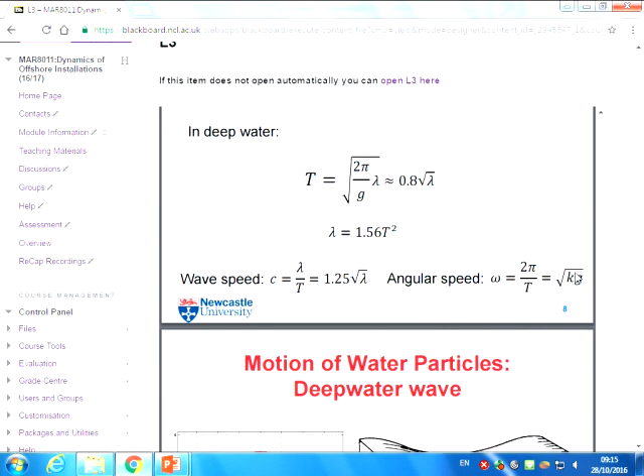Okay, and another thing is, because this expression is from some theoretical basis, today I give you some tables, and you can just find the expressions in your table, and in your calculation you can just use that. Okay. In the exams, will you give us this page? Yeah, this one is for your exam. Okay. So we can use this, from last year. We can use this. Yeah, yeah, yeah.

And in your future works, if you need to do some estimation for the wave force or something, I'm sure you can find the table somewhere. So we just use it.

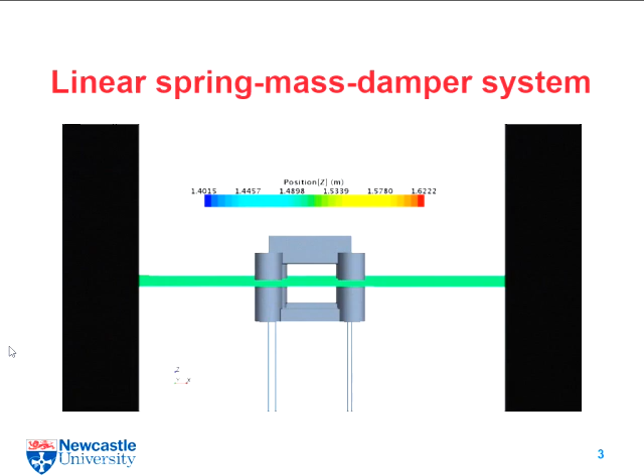So after we know the expression for regular waves, we can estimate some forces acting on the floating structures. So today we will have 3 or 4 examples to tell you how to estimate the wave forces on structures and how to get the motions based on the forces. Okay, but before that, I would like to show you a very short video. It's from a CFD simulation.

So in this structure system, you can see we have 4 mooring lines, and we have 4 columns, and we have maybe 2 or 4 pontoons. So you can see that if we assume the wave is a regular wave, you will have the structure motion like this. And if we consider the problem as a 2-dimensional problem, your motion will be in this way, right, by the waves.

And in the meantime, you also have heave. If you don't have this mooring line, you can feel the motion in z direction. And in this problem, we also have the motion in x direction. So of course, if we assume that it's a linear system, after we know the wave expression, we should be able to estimate the forces on that. And of course, after you have the force, if you can estimate the weight, we know that we have Newton's second law, and here is the motion, right?

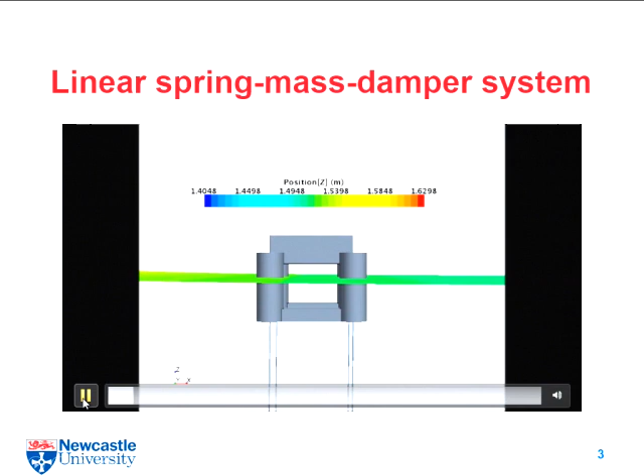I think you can feel that the motion is like something connected by a spring, right? Because after you print out the force plotting, the force will be like this. And it's like when you have a greater distance, you have greater force. So it's very like we are connected to a spring.

And we know that in water, if you do a ship resistance test, the resistance will be a function of velocity, right? We know that, and we can use this resistance curve to estimate the power you need from your propulsion system. But whatever, the force, or I use R for resistance force, will be a function of V, right?

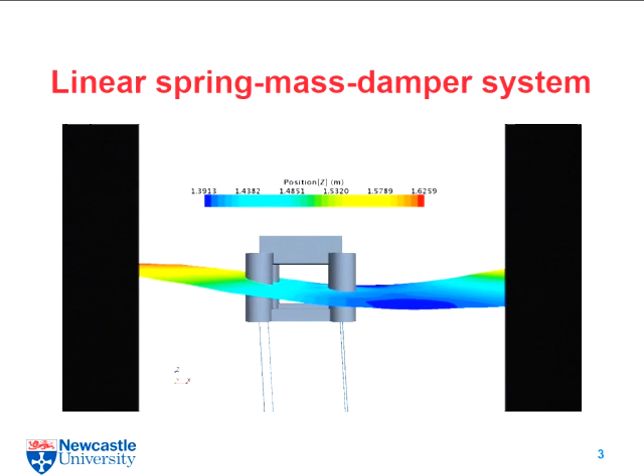It's very like it's connected to another thing, and we call that a damper. And they have different features to provide different forces. Like the first one, if we have a stiffness coefficient, the force will be something like the coefficient times the distance. You can estimate the force from this spring, right? And from the damper, it's about the speed.

If we have another coefficient, actually we can estimate the force, but this time it's not distance, it's speed. We need to do the differential operation over time.

If we have another source term for force, we can give another function, but it could be 0, right? But anyway, we can build up the equation for the whole system. We have the weight, we have the acceleration, and we have force, right? Here is this basis, and then we can create a new equation to include all the factors in this system.

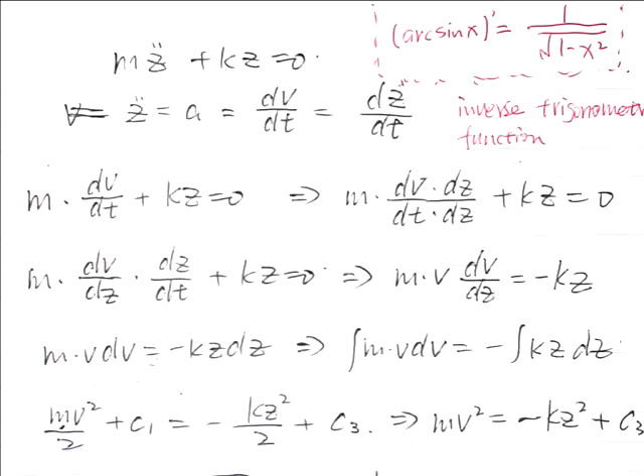Like from the very beginning, we have this equation, and according to the mathematical rules, finally we can have something here, the expression for z, the motion distance. And you can see that we have a constant here, we have a phase angle here, we have another constant here to control the motion amplitude. But anyway, you can see that if we go to the slide, it's in this form, right?

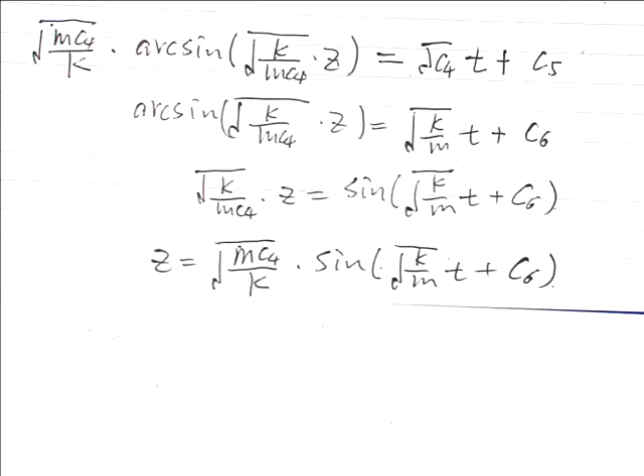And if you look at my solution carefully, you can see that the constant for the time, we call that natural frequency or natural angular speed. It's here, and you can find that from your table. So you see, it's here, constant for your time, and then it's for the conclusion here. Okay.

And then according to the definition for wave period, it should be 2 pi over the angular speed, or 2 pi over the frequency. After you know the natural frequency, we can know the natural period, right? It's over there. So to this system, you can see that if we know the mass, if we know the stiffness coefficient, actually after we know the wave, we will know the motion features of the whole system, and you can just apply the expression here as long as you have a good table.

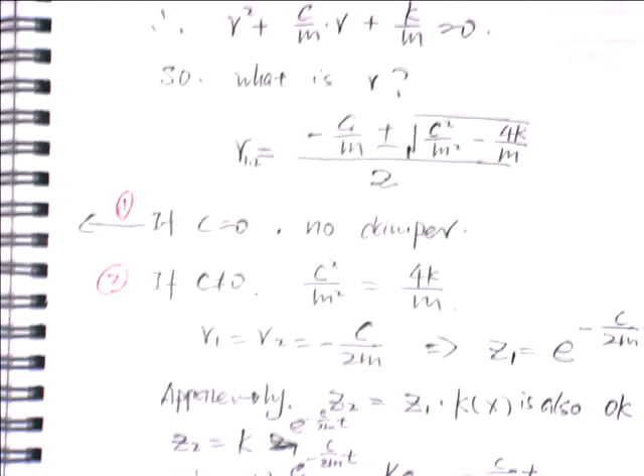And in this slide, because I got this from Professor Longbin, you will see the results straightforward. But again, last night I also did something to solve this equation. I used more than 4 hours last night to get this. And now this system is a bit more complex, you see that? Because we have the differential operations twice and one time, and also we have the original form. So according to the different values of C, we may have different solutions. Basically, if we just look at this equation, we may have 4 possible solutions.

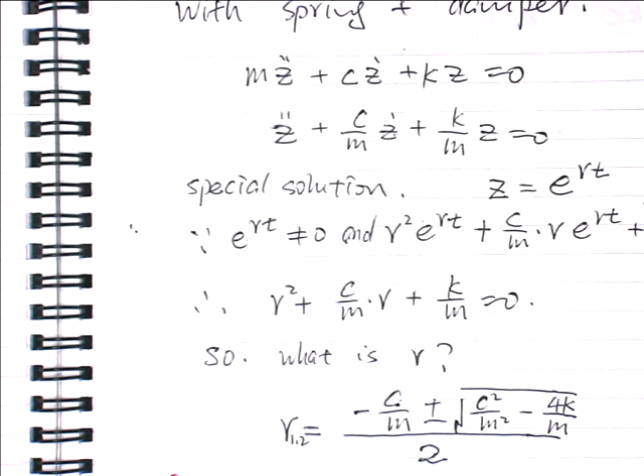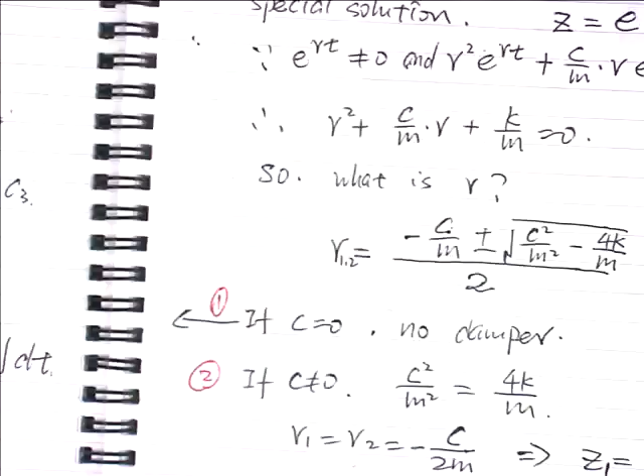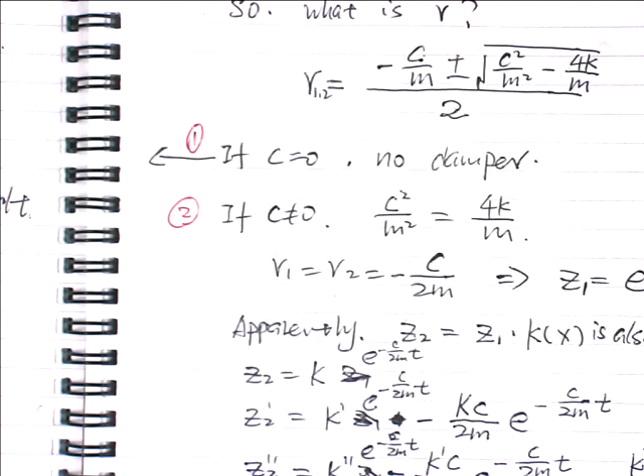The first one is, of course, C may be 0, so we can just go to the previous slide. It means we don't have this damper. So see, in my calculation, if C is 0, we can go to the previous one. But if C is not 0, we still have 3 different possible solutions, and they will present different motion features. Like when C squared over m squared is 4k over m, if in your calculation everything is correct,

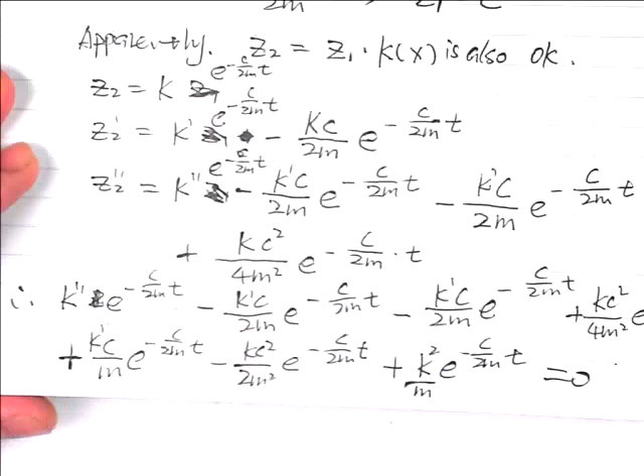and I'm confused there. Oh, here. The final solution is like this. We have some constants, but we do have an expression, and I can show you the final result is a constant, another constant, time, exponential, something like this.

But anyway, from the expression, you can see that for this system, yes, you have waves acting on that, but if you have a disturbance to your system, with the change of time, you don't have oscillations, right? Because we don't have a sine function or cosine function in this expression. So, with time, you will go to the middle slowly, and here is the theoretical basis. We don't have oscillations.

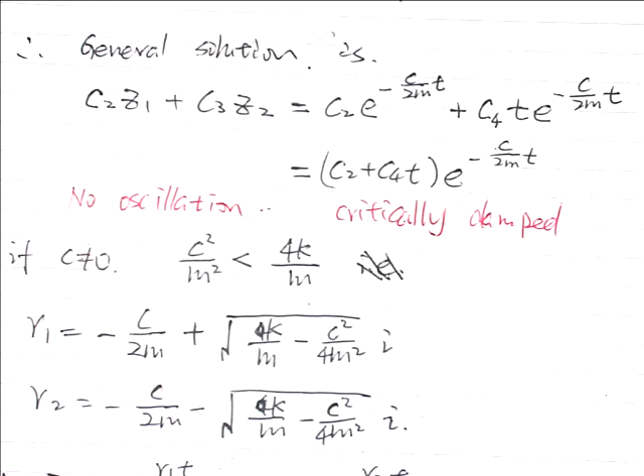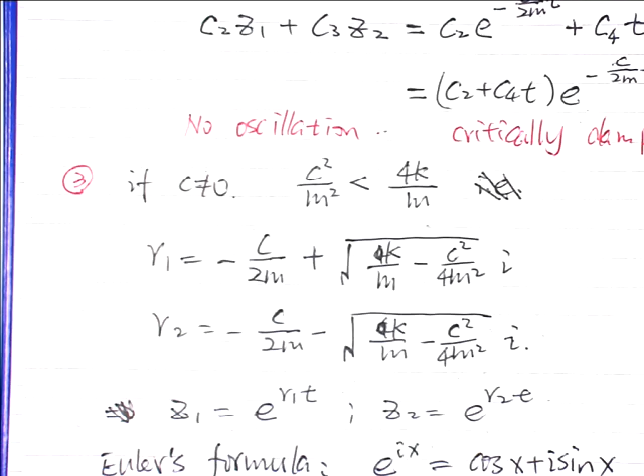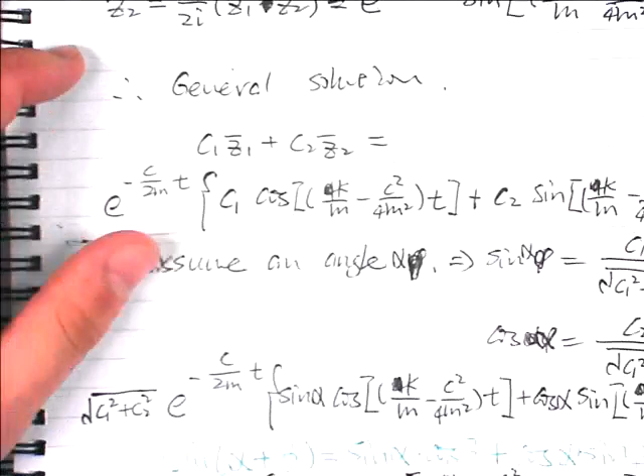If C squared over m squared is smaller than 4k over m, again we can solve this equation, and the final result will be here. It looks like a very complex expression, but if you look at this expression carefully, you can see that actually it's a cosine function, right? So in this expression, after you have a disturbance, you will have oscillations. And then, because we have a constant in this way, the oscillation will be smaller and smaller with time, right?

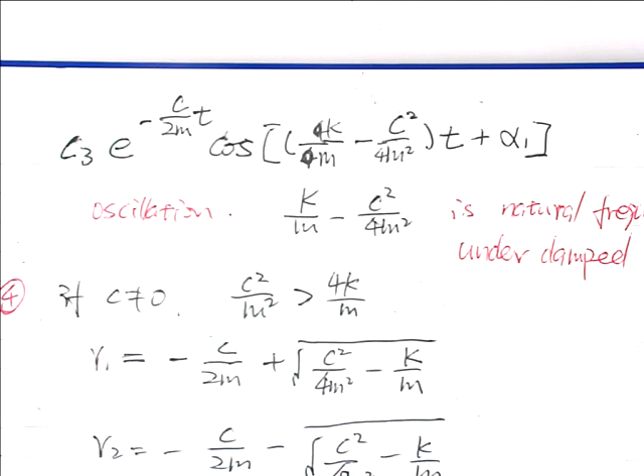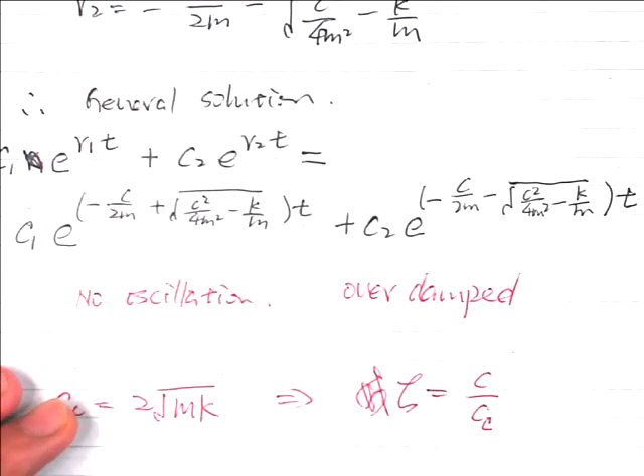If C squared over m squared is greater than 4k over m, again, I used another 10 minutes to get the result. Another expression. And you can see that in this case, we don't have oscillations again, and the expression will be here. After you have a disturbance to your system, again, the structure will go back to the middle position slowly. Probably, in this case, it has a different speed, like in this one.

So based on the expressions in this part, we will know that if you know the weather conditions in an area, and if you can assume that in this area the wave is a regular wave, if you have a good design, actually we can control the motion or the oscillation of your structure. Probably sometimes it's in this case, sometimes in this case, but in most cases we can control that. For example, we can give a good M, because we can control the weight of your structure by your design.

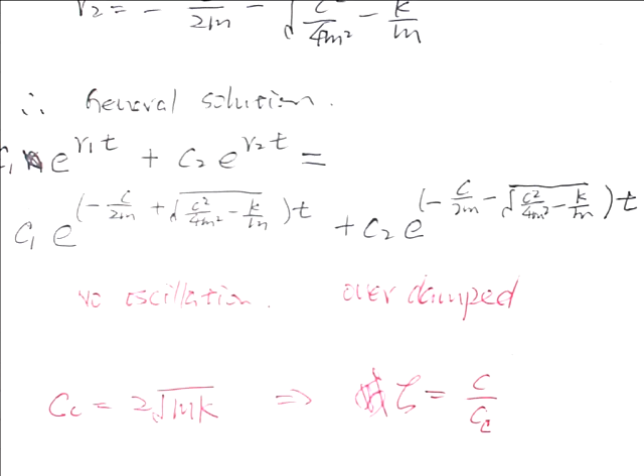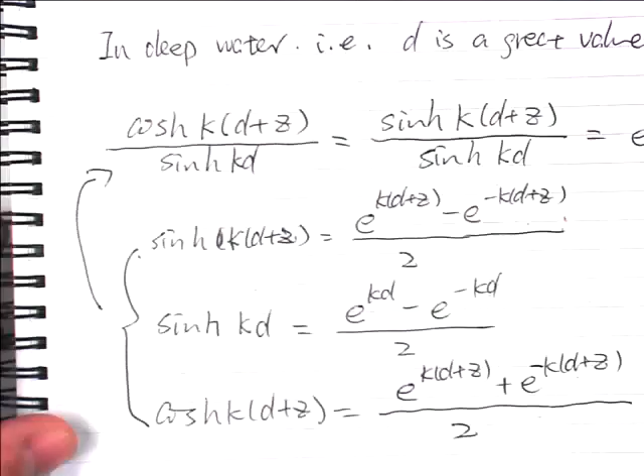So in this lecture or in this module, you don't have to understand how to get the results in this way, because you have some tables, right? But if you are interested, you can do the same thing like I did last night.

Seriously? Yeah. It depends.

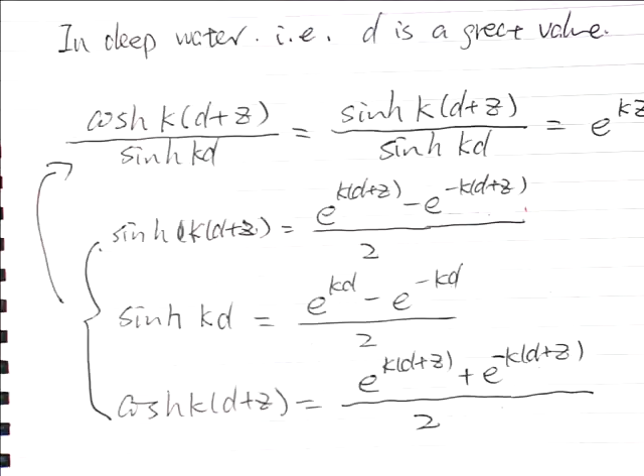So you see that in this slide from Professor Longbin, he told me we have 3 situations, but actually it doesn't include this one. We have 1, 2, 3, because we want to have a good system to include every factor we can imagine in our calculation. And then here is a very special one, and it's a very typical one.

If in your expression you have a cosine function, the oscillation will be like this. After you push it, it will oscillate. And then over time, the oscillation will be smaller and smaller, and then go to zero again. Okay?

In very practical cases, obviously we have weight, we may have a damper, we may have a spring, and we have waves impacting on that again and again with time, right? So from the very beginning, we have Kz.

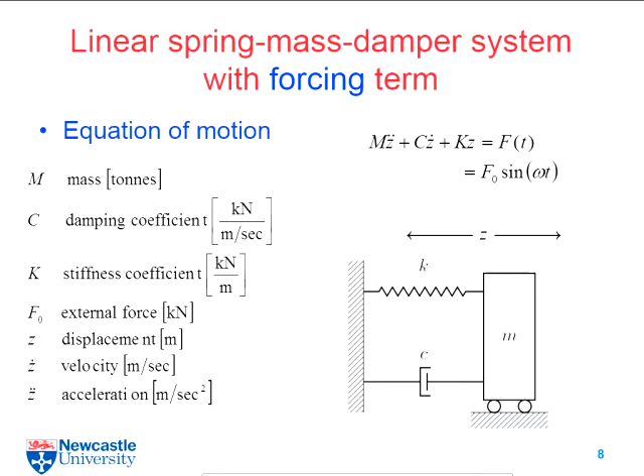So okay, you can see from this slide, I give you the expressions for the heave motion. And of course you can find them from your table, so I don't need to go through them again. But if you look at this expression, we can put some terms into a container, right? It's like a container, and we can present it in an easier way. It's F0/k times Q, if you have an expression for wave or something else. And this Q, you can find the expression.

It will be 1 over the square root of (1 minus (omega over omega natural) squared) squared plus (2 times damping ratio times omega over omega natural) squared. Here is Q, and Q should be included in the expression for heave motion or horizontal motion.

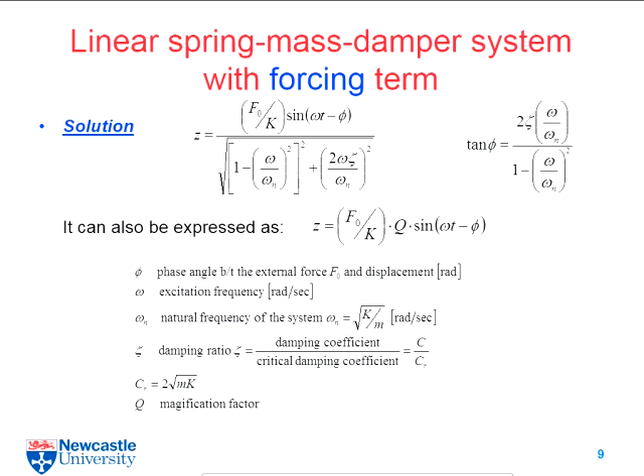But anyway, according to the expression Q, you can see that this term, of course, could be 0, could be greater than 0, but obviously it's larger than 0, right? But in this part, it may change. And then the natural frequency actually is from your design. So you can see that by controlling your design, you can control the Q, and then you can control the motion, right? So here is the reason why. Oh, here it is.

Here's the reason why when we design our structure, we try to avoid the area here, because you can see that if my natural frequency is very close to the frequency of waves, here will be 1, right, or very close to 1, I mean the value. So this part will be very close to 0. It means this part will be small, and this part will be a greater value, right? So when you calculate the motion, the motion will be greater.

Obviously for your structure it is not okay, and for your crew members on it, it is not okay. They will vomit every day. So this is motion response, yeah? Yes.

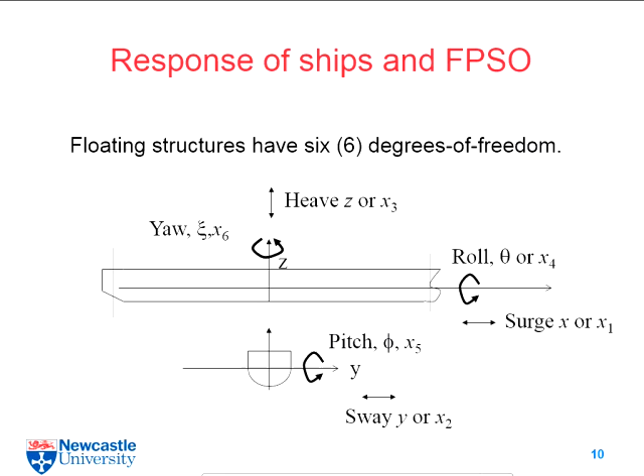And for a ship or a floating structure, we always say that we have 6-degree motion or 6-degree-of-freedom motion. And here in this slide, I can show you the 6 motions or 6 freedoms. We call them the heave, surge, and sway. Where is it? Here. Sorry, I show you the next slide. So I think this one is better, right?

We have 6 degrees of freedom. And if you don't have any mooring lines, you're just floating on open water, your ship may have motion in 6 ways. And when we try to find out the motion of your structures, our theoretical basis is F equals mA. But because for A, we may have 6 directions, and they have completely different motion features, we actually need to build up a matrix to include all the 6 degrees of freedom.

And then we need a sequence. And in this slide, I show you this sequence. Probably sometimes you see x1, x2, x3, or x11, x12, but it's always between 1 and 6. Here is the reason, and here is the sequence, okay? After you see the index here, you will see the equation is for maybe this one, or this one, okay? Because they have a sequence and they have index numbers.

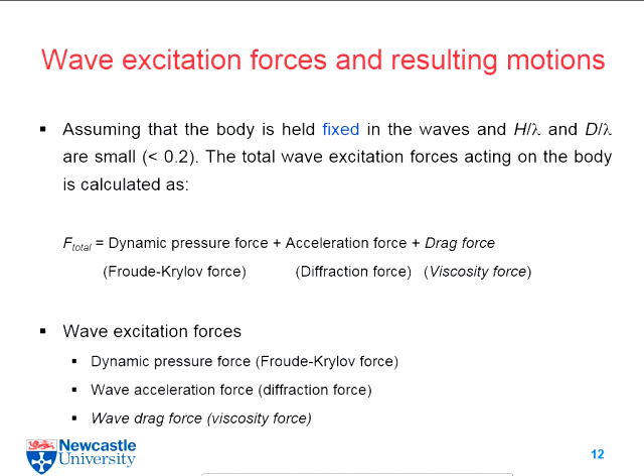Okay, so in a good calculation we need to include this part, otherwise for some structures it could be huge. Okay, so including this factor will give your calculation a better safety level or safety margin.

Can I have a break? Yeah.

If you have a pillar and you go in this way, here is water. You do the estimation for added mass in this way. But if your structure is moving in this way, here is another estimation. Yeah. So it depends on the direction, and sometimes you have different estimations with different rules. But you do need to include that factor, no matter the design of the structure. Rather than just reading? Yeah, it depends.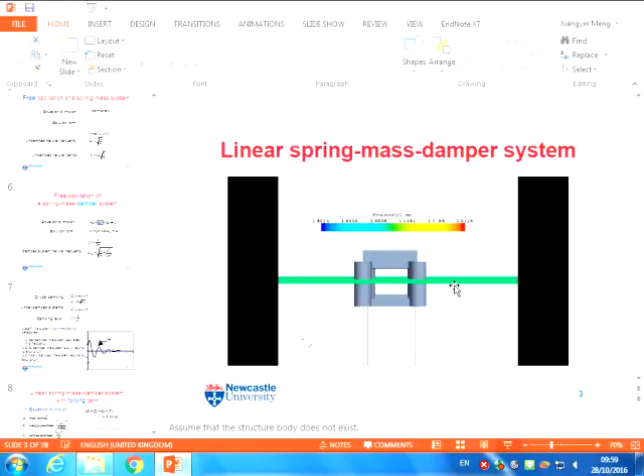It's better to understand when you're solving something rather than... There's also pneumatics, hydraulics, mechanical, and the last part, the second unit, was the electrical systems. We'll study electrical systems. Hydraulics, mechanical, electrical, you have these three. What are the differences?

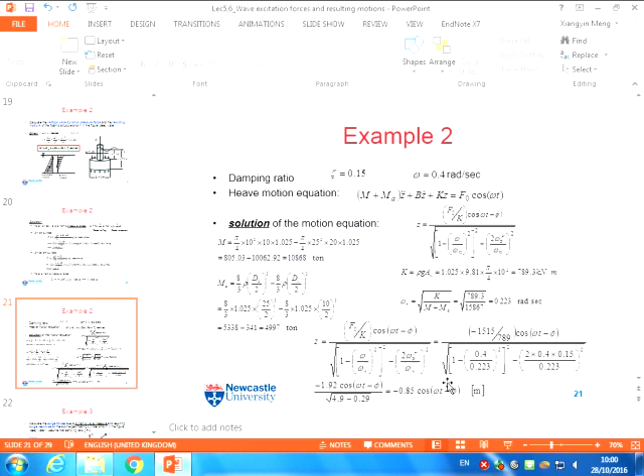What if you go through examples using this equation solution? I'll provide them in the next lecture, worked examples to show the application. We don't have the notes, so we don't know what to expect. We'll use 2 or 3 examples to let you know roughly how to use the table. Correct, because the theory part is very... Yeah, obviously, if you just know the expression, you will be confused. Okay, there will be examples. Thanks.

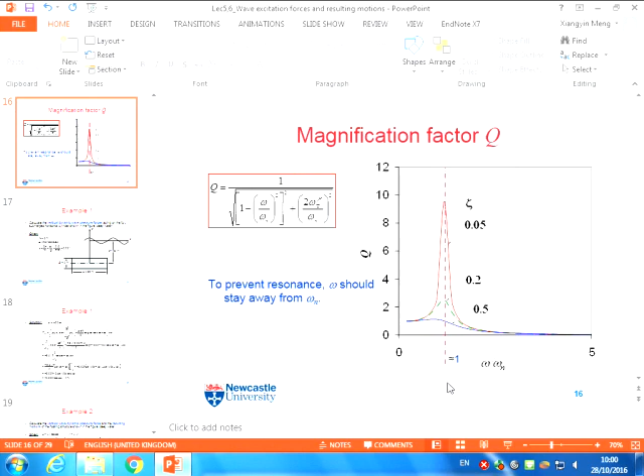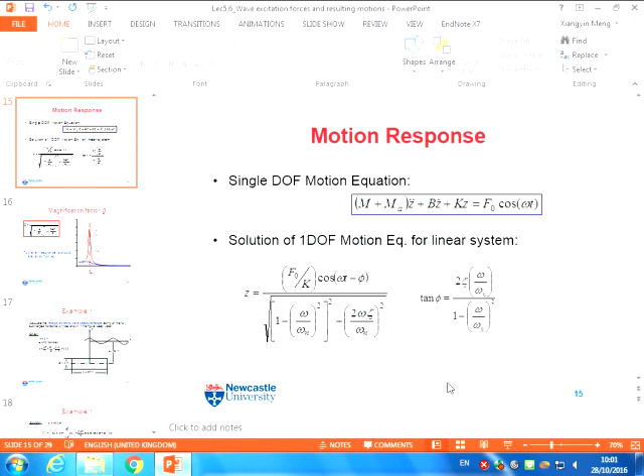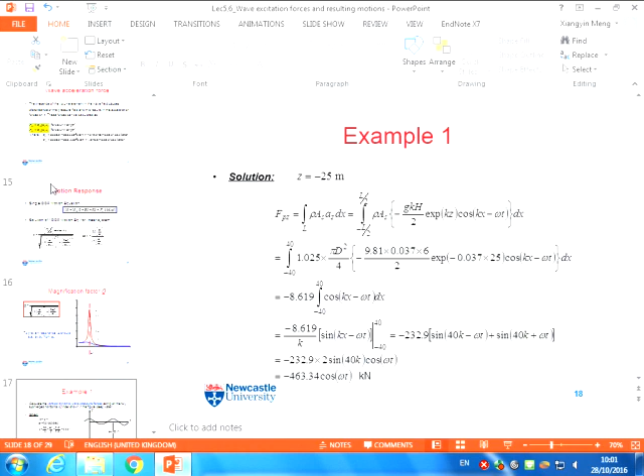The question is what will you study? Korean food is good, quite spicy. Going to die. Is it very spicy? Yeah, it looks like cuttlefish, right? I was about to take a shower in the morning. You wanna try this? I lost 10 minutes of my life waiting outside. Can you eat it? Yes. It's really bad. There's no taste, man. After it goes in the stomach, it's challenging. It's a young people's food kind of thing. Okay, guys, can I start? This is called negative peer pressure.

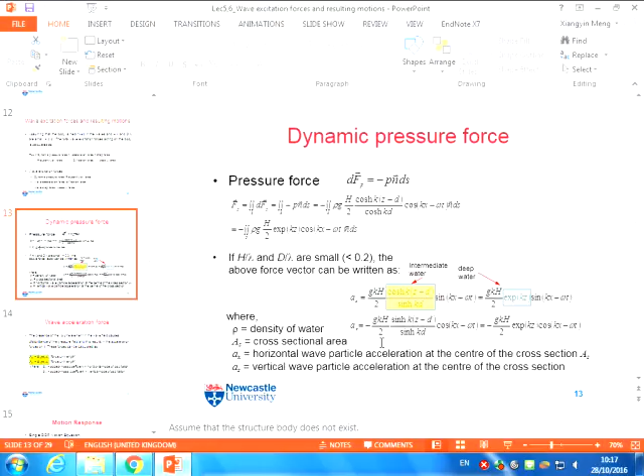When we do this, if we have a pillar, we know that at different parts, they may have different pressures acting on that from water. So if we can know the force on a very small element, we can do a surface integration for all the surface, and then the final result will be the force with the direction, right? That's the reason why you can see the expression here. We have pressure, we have directions, and we do the integration for all the surface.

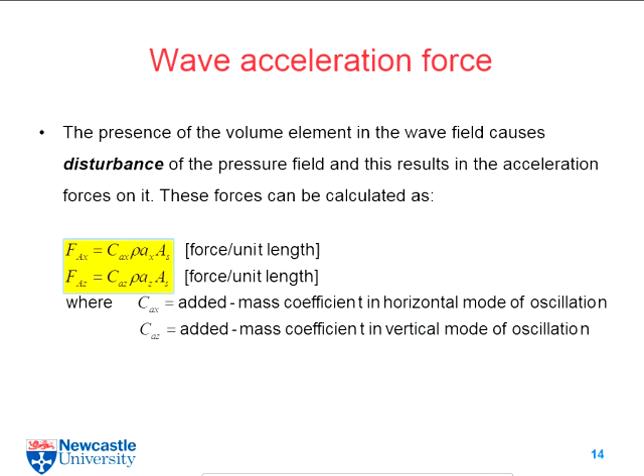Okay, now after you know the acceleration of a water particle and you know the density of this water particle, just to this area, if we have a very small length element, how to get the impacting force? Am I right?

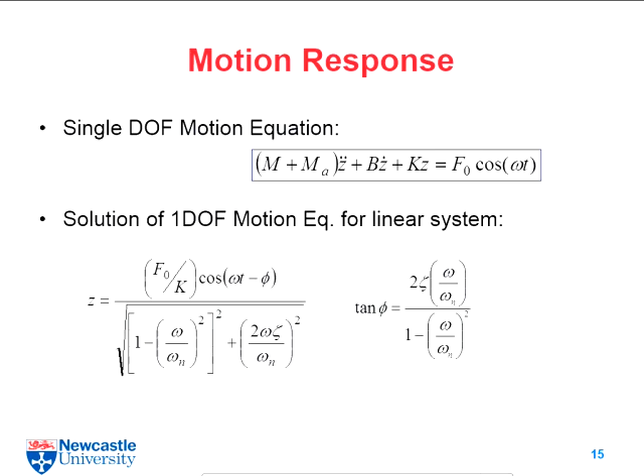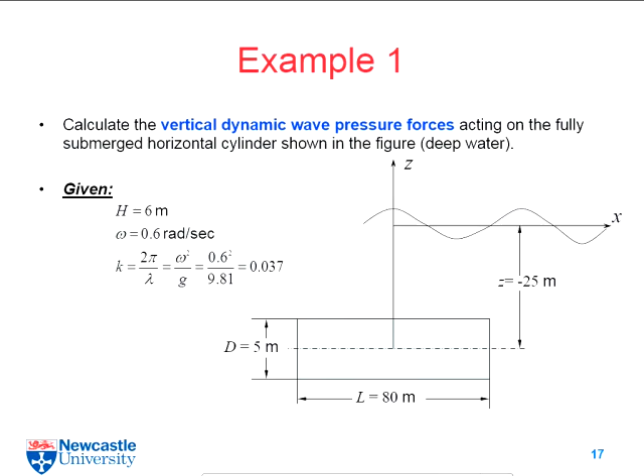So now I want to know the vertical dynamic pressure acting on this horizontal pillar. And we know that from the previous slide, we will have the expression for the acceleration in z direction. Okay? So that means if we have the mass, if we have the z acceleration, actually we know the force, right? So from your table, I think you can have this expression.

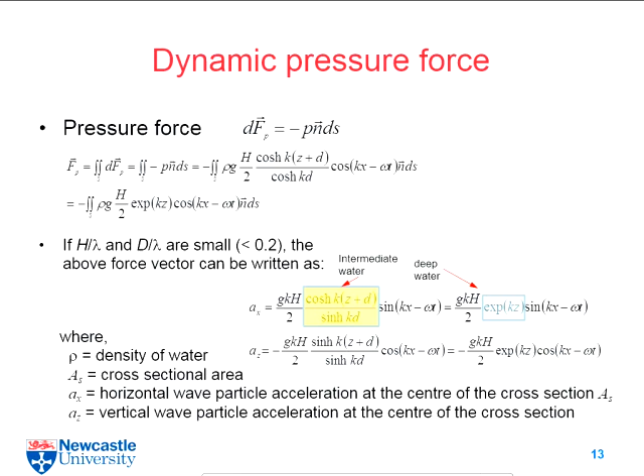And for the mass, in water we know the displacement of this structure. It means as long as we know the size of this structure, we know the displacement, and it will be rho water multiplied by the volume, right? So if we do an integration from this end to this end, we will know the total force on that, right? So in this example, you will see the calculation in this way. I don't think I have time to go through, but you can have a look after this lecture, okay?

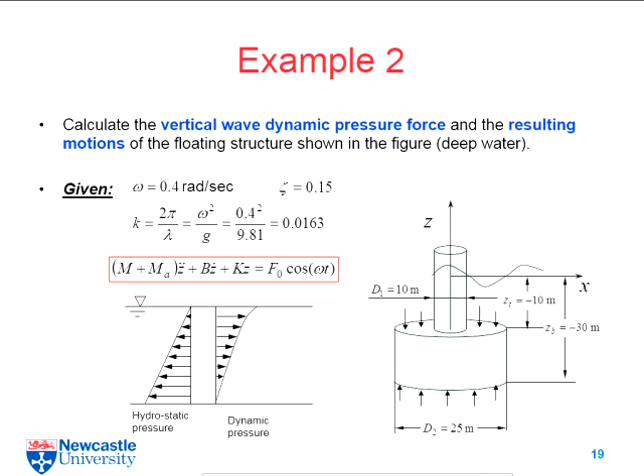And in the estimation, you can see that actually we don't do the integration. We just assume that the pressure will be all the same, like the pressure on this point. It will simplify our calculation. And because we know that the structure is small and the wavelength is quite big, the change here and here will be very small. So it means we can just use the pressure here to generate this motion.

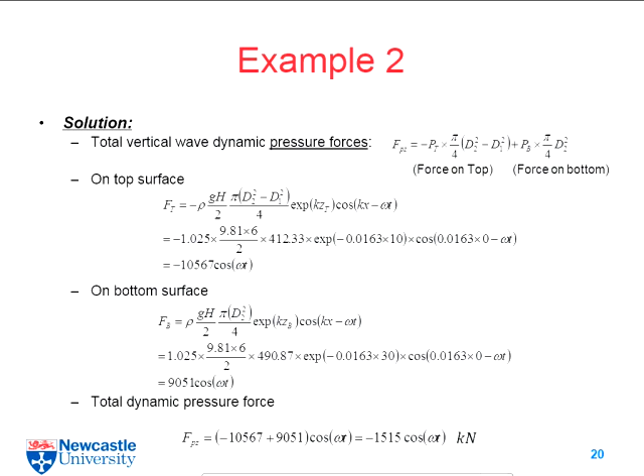So you can see that we just use x is 0 to do the estimation, and it will be quite simple. On the top, we have this pressure. On the bottom, we have this pressure. Put them together. Here is the total force for your heave motion. Okay, and after that, we have the force here already, and according to your table, you can calculate what is K. It's in equation 26. We call that hydrostatic stiffness.

For the natural frequency, it's in equation 27. So you can see that if we have a good table, we can solve this problem for the estimation. And for the mass, here is the weight of your structure. And of course, we need to add another part. We call that added mass. And in your table, page 4, you have two equations to estimate the added mass, but actually they are for different motions.

If we have a pillar, here is the diameter, and it's moving in this way, we will use this part to push the water. And you can see that the added mass estimation will be cubic. It's for this case. But if the pillar motion is in this way, we assume that the added mass is exactly the same as the mass of the structure. So in some cases it could be huge, more than thousands of tons. So in this case, it's for heave motion, so we will use the first one to estimate the added mass. That's the reason why you can see this calculation.

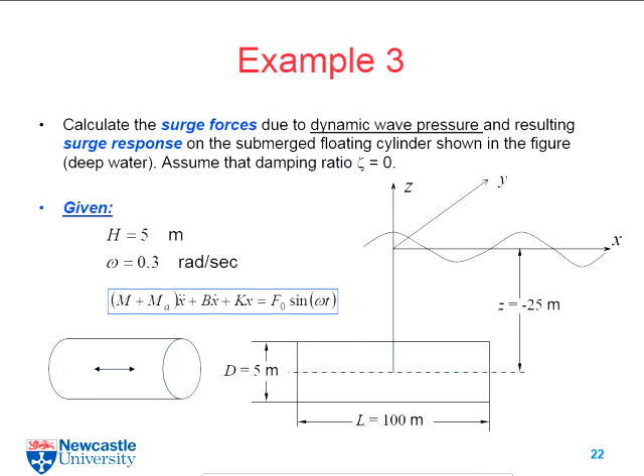So this time, when we try to find out the force on that, to generate the surge motion, I should get the force on this surface and the force on this surface, right? Because the force on this surface will not generate surge. I just need two forces on the two ends. That's the reason why you can see the expressions here. The total force will be the force on left-hand side plus the force on right-hand side.

Because we have expressions in that table, we can just carry on the calculation and find out the final expression here. But by this format, you can see that if I have a good design, I can make it 0, right? If L K over 2 is n pi, the sine function will be 0, right?

For the wave number, we know we will get that by 2 pi over lambda. Here is your wavelength. And L is your design. It means if L is n lambda, the force will be very small, and it could be 0 in some cases. It means the motion could be 0, right? So from this example, you can see that if you know the weather conditions or the wave conditions in some area, you can design based on that, and you can control the motion. Here is the basis.

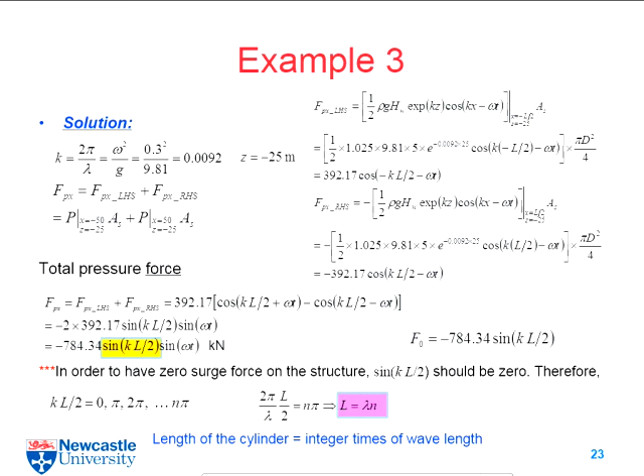And then, I think in this example, it was told that the damping ratio is 0 because it will simplify the calculation. After you know the damping ratio is 0, it means the damping coefficient is 0, right? And because the motion is in this way, we don't have something like a spring, right? Because we talked about that in the first lecture. It means K is 0, right? So in this expression, we can simplify the motion equation.

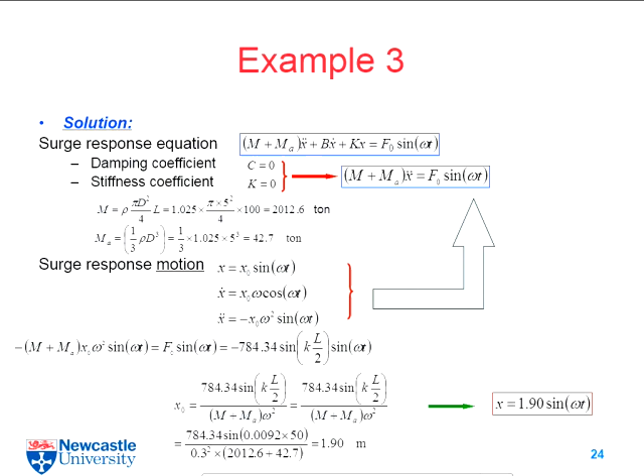You can go through the 3 examples after this lecture, and actually we have another one, but I think I can leave this to next lecture or to the final review for this module, because sometimes in your final exam you can see this. So yeah, I think I can finish this lecture today.

Now you are talking about the weight estimation. For the real weight of that structure, of course you need to include everything. But for added mass, it's not. Because it's only the surface of the one here that is pushing it off. The other one here is already above, it's in water already, so you don't have the surface to push water. It's only the surface that is pushing the water. So your calculation to include all the surface is wrong, because this surface is not working there. Yeah, that's what I mean.

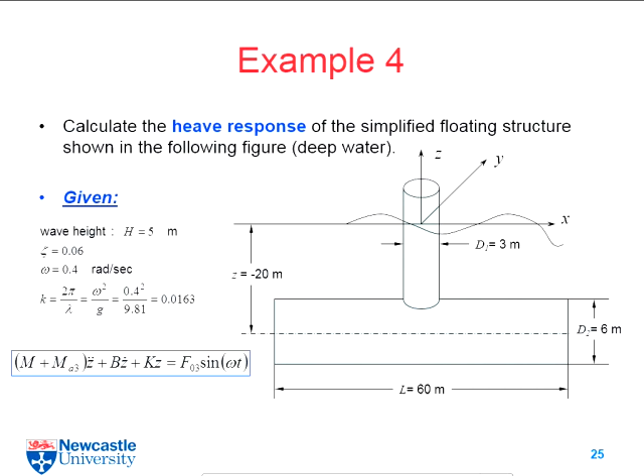Oh, by the way, do you know we have a job event next week? I think it's next Friday. Are they going to hire someone? I'm preparing my CV. But I think you can just talk to them. In previous years, they go with their CV. I don't think they will sign the contract next week, but you can give them a good impression.

For this part, because in this lecture we have two parts from Mia and Wen Xian, but for waves, I think if you... I think you can download something from our university.